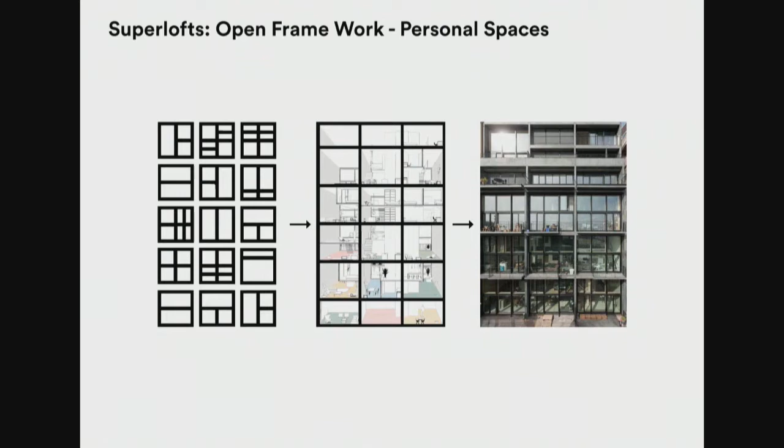Vodafone picked up the success of superlofts, which has already been developed not only in Amsterdam but in different cities in the Netherlands and abroad, and they made a commercial about it. This tells the story so clearly that I would like to show you.

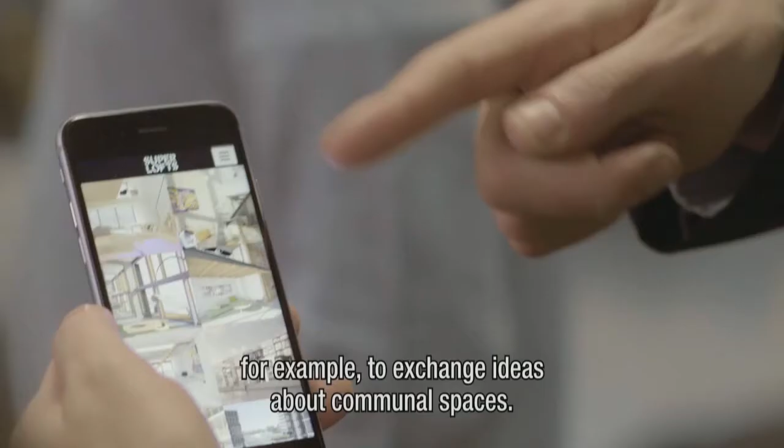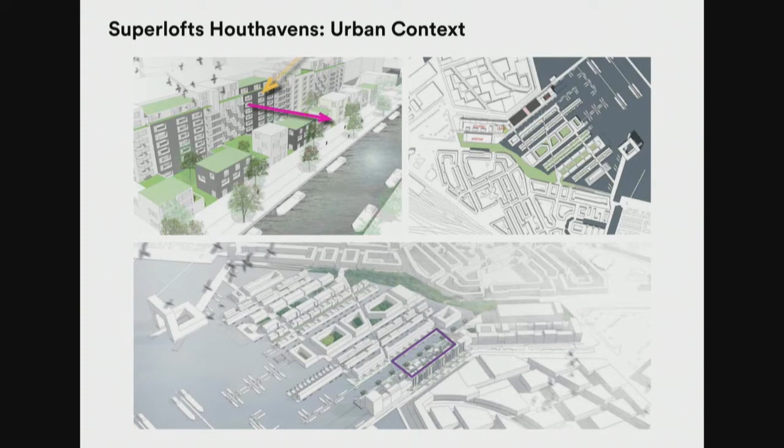Well, this commercial made superlofts quite famous in the Netherlands and resulted in thousands of people applying to our community. We went to other municipalities and managed to get all kinds of interesting plots of land at the fringe of the cities, often in industrial areas or old harbor areas that are transforming, using the superlofts concept as a pioneering project, as an urban catalyst to transform these areas.

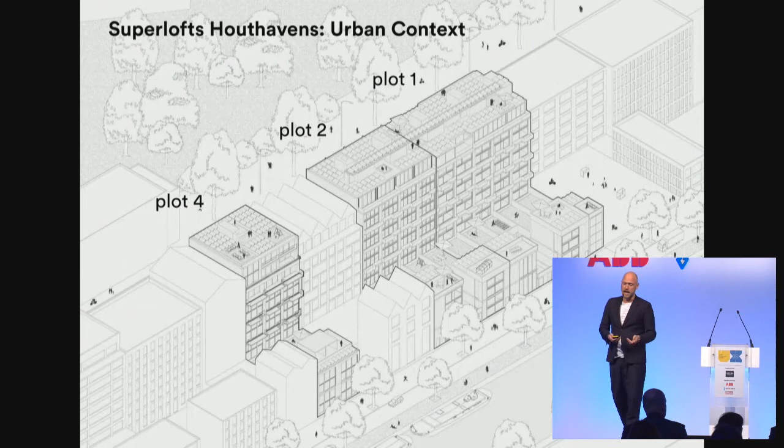This is the Houthavens in Amsterdam, in which the first 3 projects are built. And here you see plot 4. The architecture has a very robust and industrial character. It's no-nonsense architecture that allows, by its openness, the sun to come very deep into the apartments.

And this creates the opportunity to reinvent the apartment in a very interesting way, because you can create all kinds of qualitative spaces very deep in the building. And this also makes the building quite affordable for people to develop.

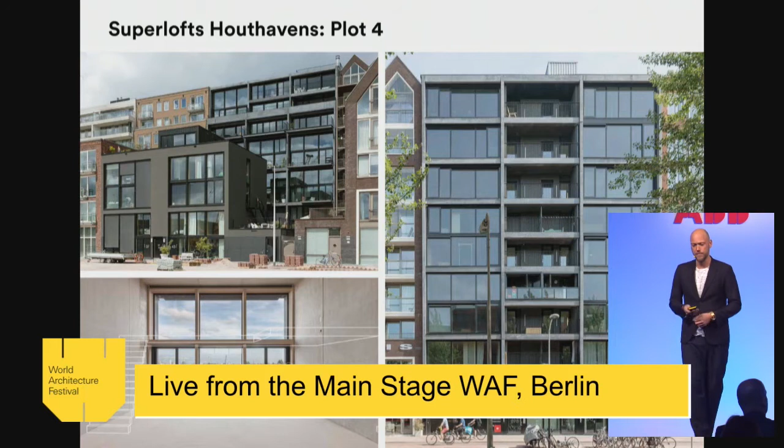Here you see the raw space on the left side. People buy it like this and then design and build their own house in it. They can also hire us to do so, but not everyone does. A lot of people use their sweat equity to build their home. This is interesting because the project ends up about 20% more affordable than a regular development, and this allows a large group of people to live in a very unique and qualitative way.

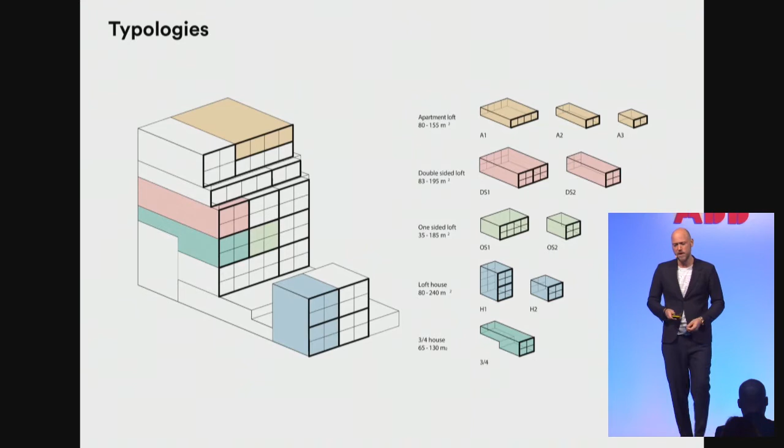So together with this building community, we first create the ideal mix of apartment types - very affordable ones, starting at 150,000 euros per apartment, up to very luxurious types. This mix is what you need to create a real urban situation. You don't want a gated community only for the happy few; you really want to make a vibrant community. That's why it's very important to make a good mix of different apartments.

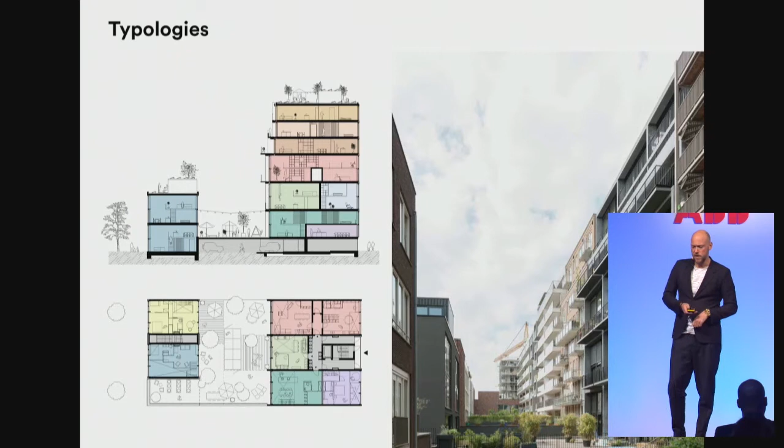We help to organize this process with the homeowners. Here you see the floor plan and the section, which shows you can generate all kinds of apartment types around this smart core. In this case you see 4 different apartments, but you can easily make 5, or just 1. We then develop all these kinds of building systems that people can choose from and update their design with.

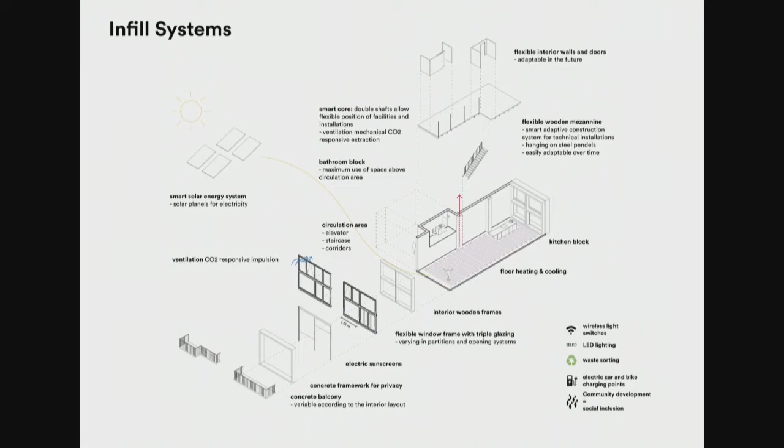The building is, by the way, completely climate neutral. It uses solar power, geothermal heat pump, geothermal cooling, CO2-responsive ventilation, electric window shutters, and so on. So it is really a sustainable building that is completely independent from the grid.

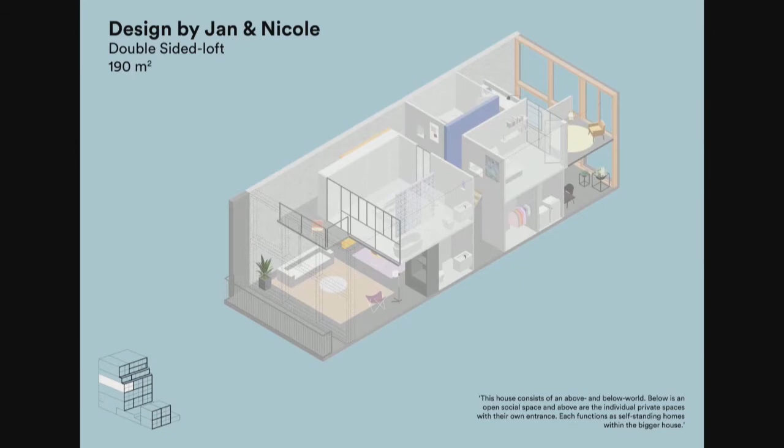In this house, you can see 2 entrances on the ground floor, allowing an office workspace to be combined with an apartment on an upper floor of this apartment building. So this is interesting - it's not only a place for sleeping, but you can also see this as a real loft building with workspaces integrated.

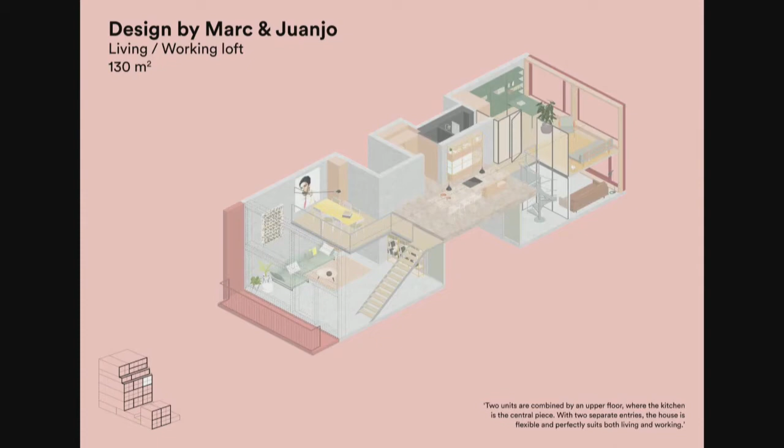So we build it in a prefab way. All the wall and floor elements are prefab concrete, creating these kind of boxes which are stacked as containers on top of each other. What is smart about the project is that the elevator only stops on every other floor.

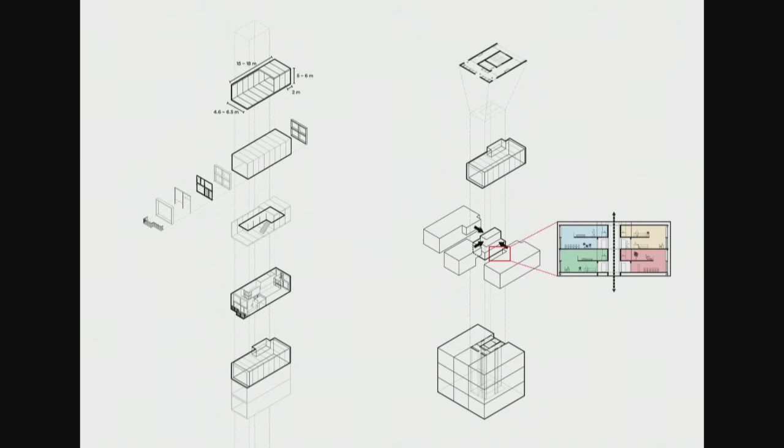This allows the mezzanine floor in the core to be used for bathroom storage. You see that here in a tower that we are developing now, that the mezzanine floor, normally a dark space, is used for functional zoning. This makes a very interesting ratio between the bruto and netto floor surface, and allows you to make this void in a very affordable way.

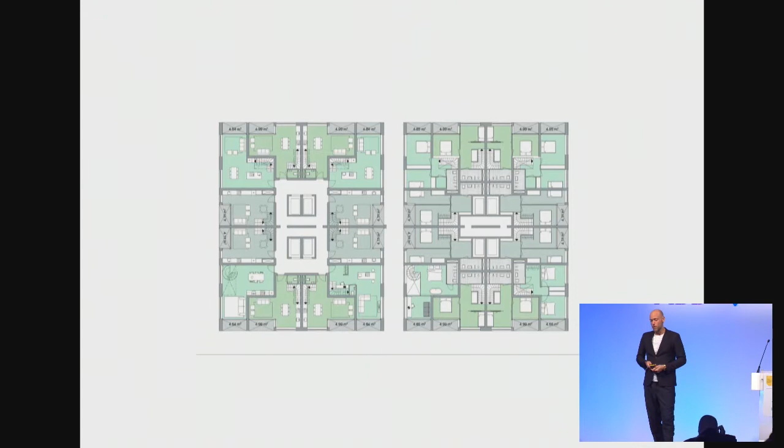So the Superlofts community is now quite large and it's operating in different countries. We are approached by local architects or developers and help them set up a community project with them, a building, and then co-design it with them.

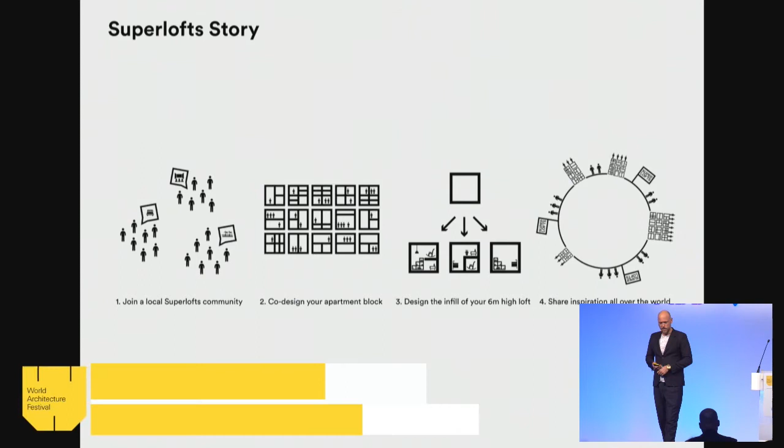So this is how it works. People join in a community, then they co-design the apartment block with us and the local partner. We design the infill, the people design their own infill systems, and then can share their inspiration on our platform all over the world. It's very nice to see people get so excited, because there's nothing more nice than to design your own house. It's fantastic to see that this creativity that everyone has really comes to life.

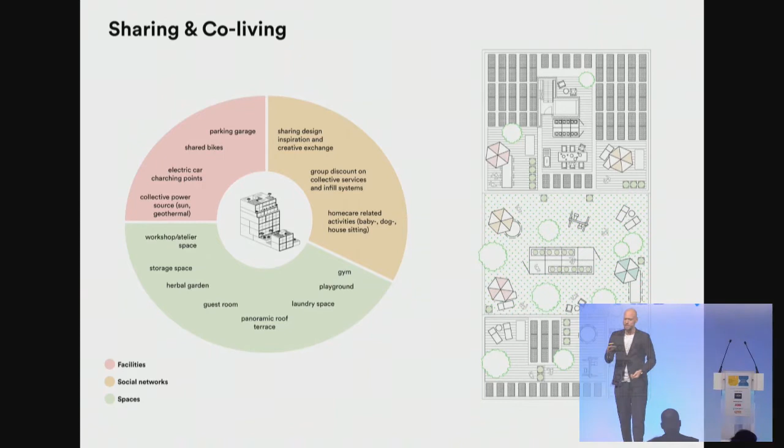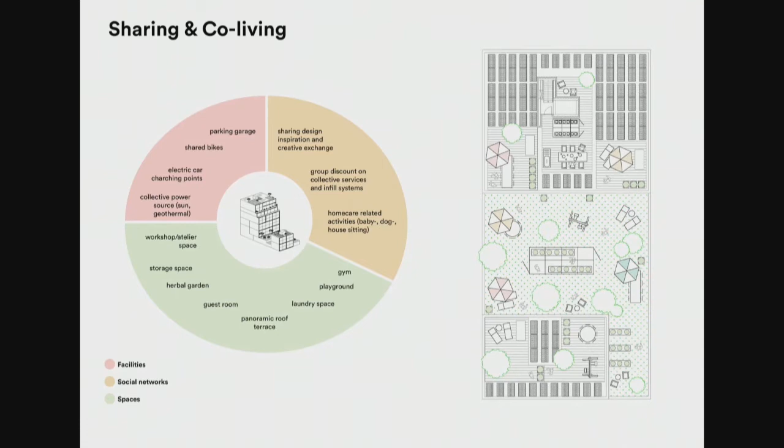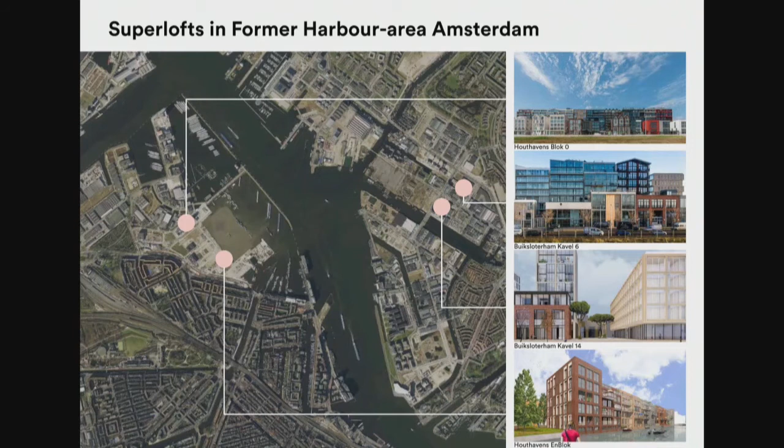So in the Netherlands, we are working in Amsterdam on 4 sites in the harbor. And this is one of the other projects that we have realized there.

The extra deep facade gives privacy on the balcony. It also organizes all kinds of things like the sewer system for the rainwater, ventilation. Everything is integrated in this kind of smart facade.

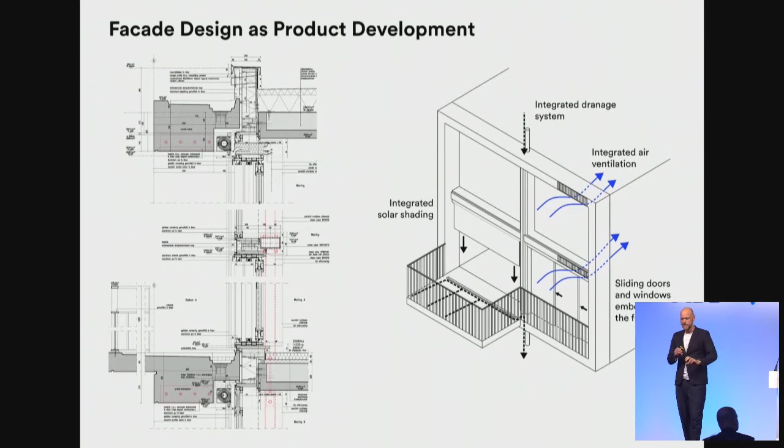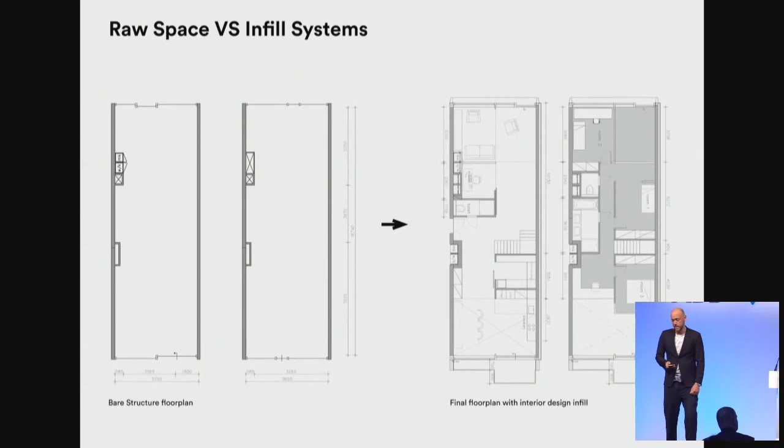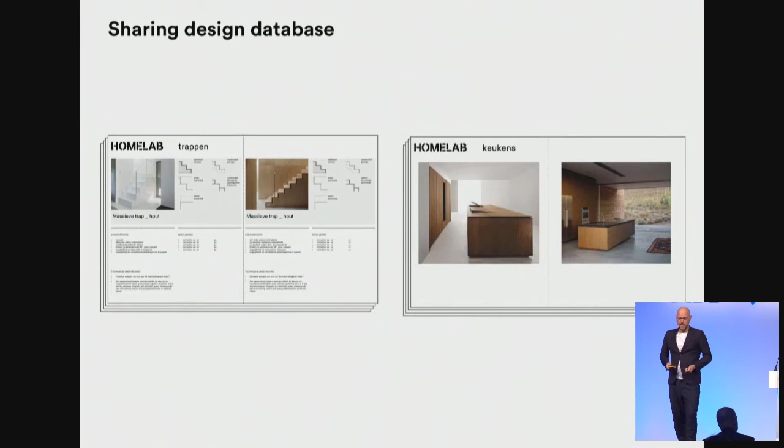And our interior design department, Homelab, actually helps people to customize their interiors. We are now working with other architects to look at digital fabrication tools to make those interiors even more affordable. And we are building this library with shared elements for interiors, where people can share their drawings.

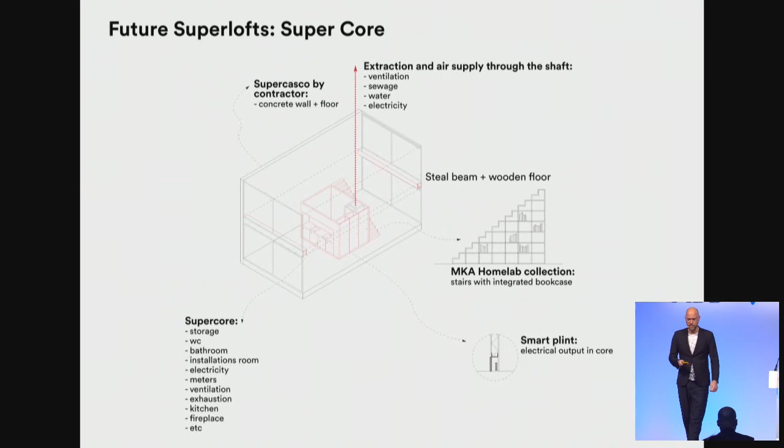Here you see some of the customizable cores that we are developing, like around the shaft, the building casco, and the last movie.